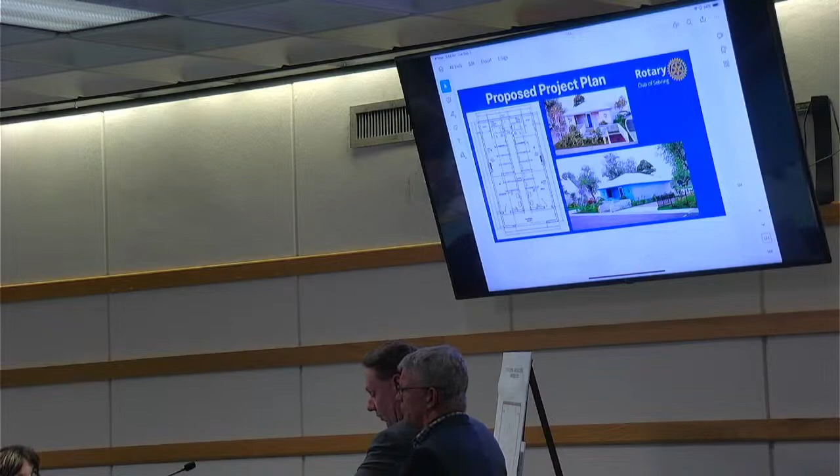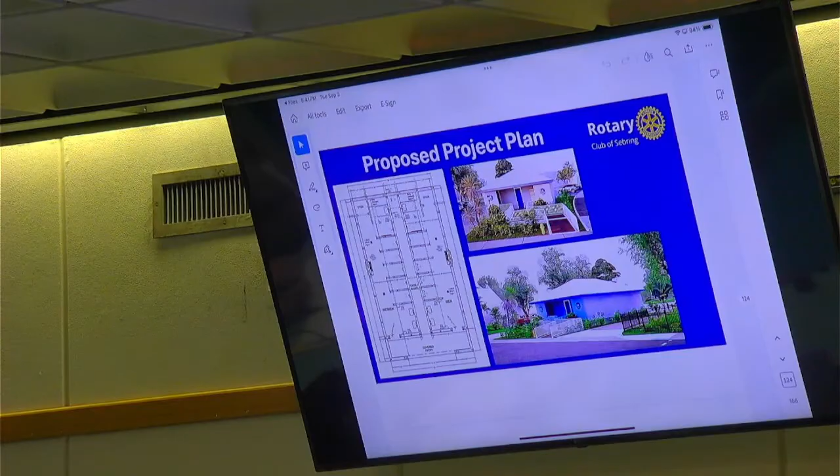It'll be concrete block walls with stucco finish inside and out, standing seam metal roof, epoxy floor with floor drains, automatic faucets, toilets, hand dryers, and lighting, air conditioned and wired for exterior lights and cameras. It'll be ADA compliant, vandal resistant. Again, we'll have built-in large baby changing tables that will be large enough to support an adult, should somebody need to change an adult. And we will also include a Rotary and Sebring themed mural that's going to face the circle.

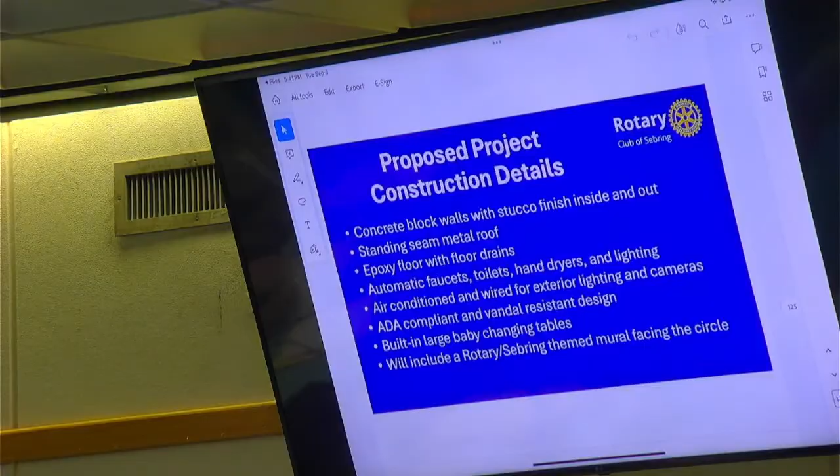The project financials are as follows. We have a preliminary cost estimate of about $200,000. The Rotary Club of Sebring is committed to contribute a minimum of $50,000, and we believe the city of Sebring is going to contribute $50,000. We have a request from the CRA to contribute another $50,000, and then the gap between that money and the ultimate cost will be fundraised by the Rotary Clubs.

We have also a number of members of the Rotary Club of Sebring here, including George Hensley, who's, in addition to being, I believe, the longest member of the Rotary Club of Sebring, also a former mayor. George, do you want to get up and say anything about the project? Yes, he does.

Thank you very much. Yes, I am the longest member of the club, not in length, but time, since 1963. And I'm the oldest member, and I don't know if that's a good thing or a bad thing, really, at this point, but I do want to just share with you that the Rotary Club of Sebring, formed in 1924, has done a lot for our community. We have Rotary Park that rebuilt the pier a number of years ago.

Our fundraising and giving throughout the community, to a lot of different organizations, doesn't get published very much, but I want to just tell you that Rotary Charities is very, very active in supporting the community and the organizations that help people within the community. So this project, we feel, is an opportunity for us to really get together, partner with the city, the CRA, and our own members and fundraisers to present this project to the city as a part of our 100th anniversary. So we encourage you to support that, encourage you to say, yes, that's a really good thing. Josh, thank you very much, our former president of our club.

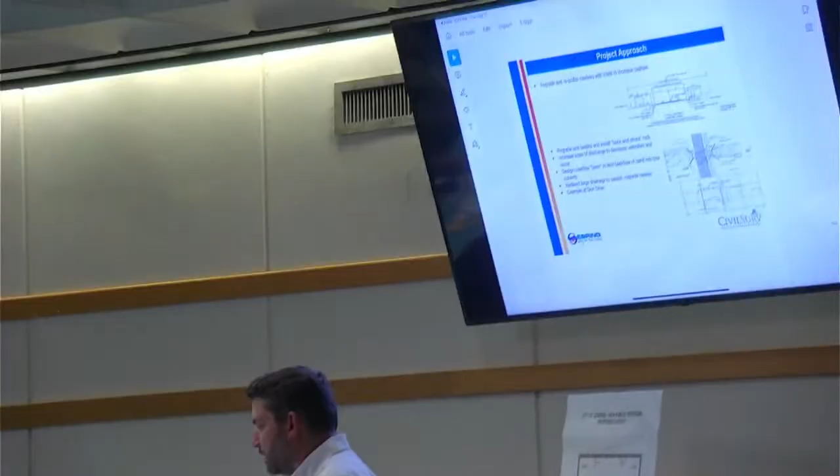This is some of our interesting approaches. So what we were doing is regrading, and this is just a typical profile of what the road looks like. Mill and resurface, then regrade it so it has a standard side-to-side slope along with longitudinal standard sloping.

Some of the large swales, we calculated how large they had to be and increased their size notably. This example is at St. Agnes, but there's another one at Don Drive. We allowed this to decrease the amount of discharge but also slow velocity, because if you make the area and volume bigger, it'll send more through. But there are some interesting things we added here.

There's almost like a berm—can't quite see it in this printout, I apologize, but depending on which one you got, hopefully it's visible. What that berm does, on the effluent side as it goes toward the lake, is stop debris from going into the lake on one side. It just skims off, and you have the fast-moving water, largely coming from large swales and culverts.

Lake Sebring is an example, Don Drive is an example, and then down by Don Jose, and St. Agnes. So those are kind of your big ones where this would be applicable.

The other benefit of the berm is to prevent sand from coming back in. So we have it so the water actually has to build up and go over into your lake. We designed it at roughly the high water mark of where your lake should be.

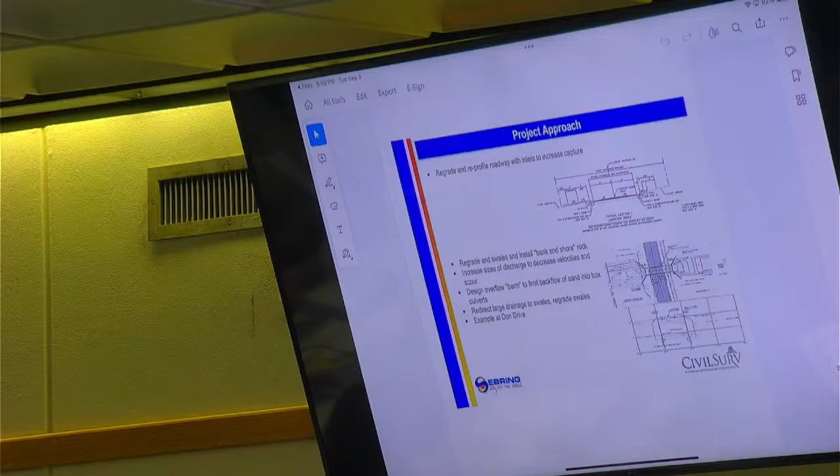All right, next slide. So we noted an unusual issue—geometry horizontal was a little off in a couple places. The lane widths actually vary, and there's an area where it looks like it should follow a radius, but it doesn't. It was almost like pieces put together of vectors—a distance and a length, a distance and a length, a distance and a length. That may well be leading to it feeling strange when driving it.

So the rule for us is either fix all of it or none of it. And what we found was a way we could do it within the area that existed, but meet all of what I'll call current rules for a roadway.

What we did was find some widths that were highly variable. Some of the narrowest lanes are actually 10.9 feet up to 13 feet, which is really, really wide—compare that to I-95, which is 12 feet. So that's what we believe might have been leading to the speeding, because we heard that. We came up with a way to address that.

What we did was narrow up the lanes to a standard 11 feet. We've got some comparable examples, so this is not unheard of—it's actually a pretty standard practice. But the reason we narrowed it up is multifold.

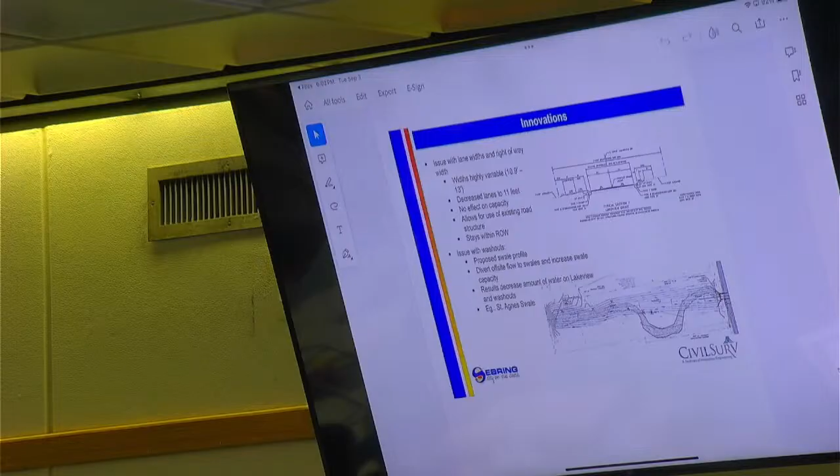And kind of where it narrows in, and this is another one at Don, where it narrows in. What we've done is put some differing types of riprap, and that's to hold the structure so it doesn't wash away during large events. This is kind of a neat thing we did at Don.

So the existing culvert is what nature cut, a path that goes basically straight down to Don and then straight over, paralleling it. The outfall there - the conveyance system is 15 to 18 inches depending where it is along there. We've increased the size to 36, but also we've cut it, and that's what it kind of goes left on your page. We put in a divider and bermed it up to force it to go into the existing channel that's already there, the existing canal.

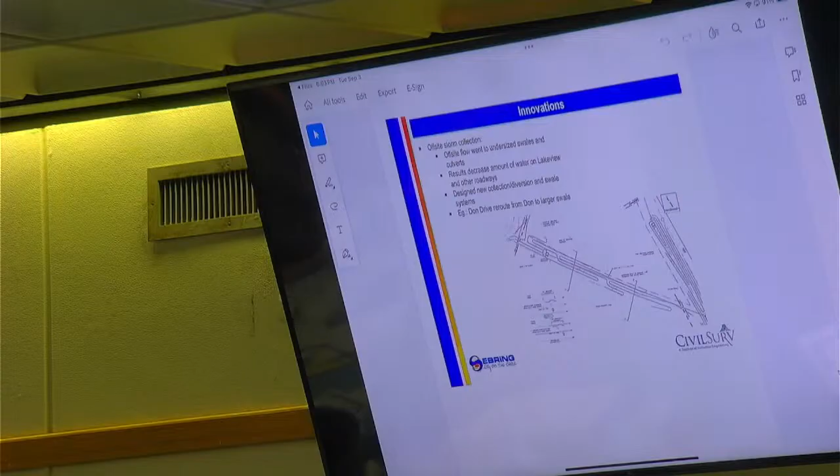And then once it goes - next slide - once it goes into that canal, what we've done is put a deep bank and shore type riprap, which is designed basically for lake systems, almost identical to what you have, but it can actually handle tidals. So it's not going to wash away like some of your existing ones.

And the width on it, just comparably, is once it gets past the seawall, roughly 2 to 3 times the width. So it'll really slow it down, that way it's not just ripping apart the lake side as it goes through. When you have a big rain event, it's designed for this big rain event, and it knows it's coming.

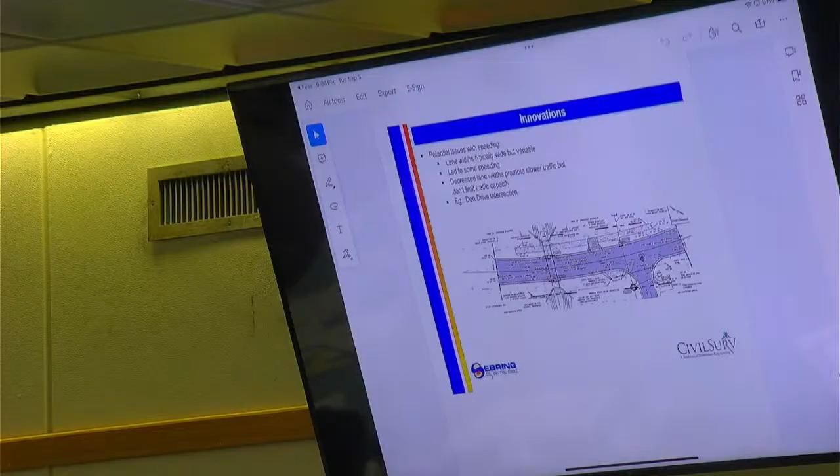This is just to kind of show you on this slide here. It's fairly incomprehensible, but you can see it just a little bit. It goes in - it's only a foot. It goes in on either lane, but it should slow things down. We looked at doing speed humps or speed tables or things like that.

One of the last slides I'll show you - it's just because of the type of road it is, it's not allowed. We'd have to completely - when I say the type, every road has a classification, every major road. And this is one of the main roads for the city, arguably. It's one of the main roads for the area, and it's called a major collector.

And because it's a major collector, unless you say, hey, we don't want this to be a major collector, we're calling this something else, you'd have to petition the DOT to get them to reclassify it. If they reclassify it, you can do whatever you want, but then it's just a local road. And if that's done, it's a tough process, and I'm not 100% certain that's what you want to do. If you want to slow it down that much, you'd actually have to put speed limit changes in, take it down to like a 25 instead of a 35, and that would prevent some of the spread in the offsite and things like that.

But just to give you a history on it, where we're redoing the first ones - the major ones are at Lake Sebring, at St. Agnes, just north of Don Jose at Don Drive. So these are some of the main ones that come through. And then, oh yeah, Pinewood - that was a double barrel that kind of goes out to a large outfall there.

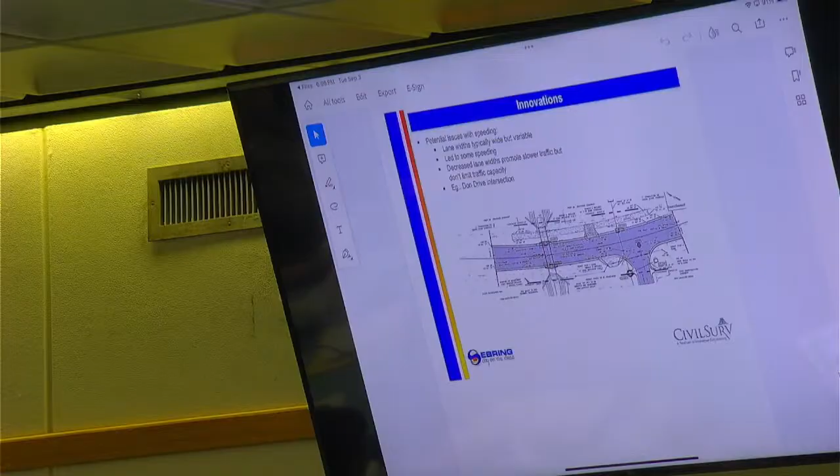First phase, and this is largely due to two things - offsite improvements. We think we can cut some costs here. But on the next one, that kind of defines what each one of these are. So at each one of these, it'll narrow up to that 11 foot, which will slow things down because you'll feel it kind of a little closer.

But when I say 11 foot, that's, I believe, College Drive - that's roughly the width there. That's an 11 foot, there's a lot of 11 foot, there's some 10 feet in the area, so it's not going to feel super narrow. It's not a tiny little downtown street. It's an 11 foot, and the actual conveying capacity is 99 point something percent of the standard 12 foot lane. So, next one.

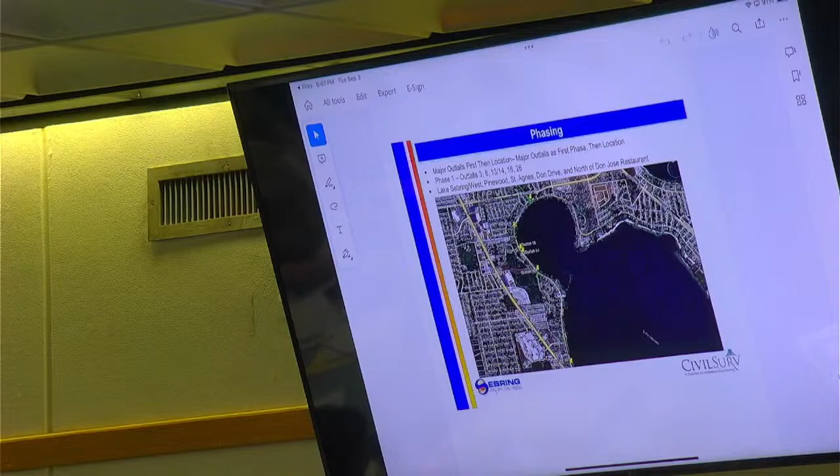So for this phase one, the initial cost right now, the estimate for construction is about 6.3, but we think we can cut a decent amount out because right now we have, just in case we can't do the offsite swale, we have a trench drain.

So we have to try to keep all of that water from coming onto the road. We put trench drain just inside the curb, because we've seen it every time there's a rain event. It either comes down off the hill or it goes down and hits that hard pan and comes in. So this was a way to cut it off from coming into the road itself.

But we believe we can cut that out and put a much cheaper option in, which is like a tiny swale. Deepest part might be 1 foot deep, basically to intercept all the offsite water and then convey it into our system. And when I say offsite, I mean from all the neighboring properties, it's largely residential.

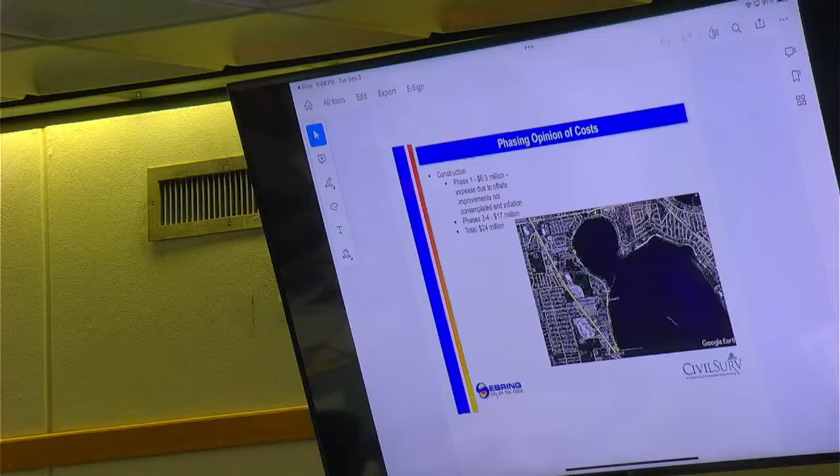Next, let's go through some comparable roadways with similar width and needs, because that's probably the only notable change. So if you're in Winter Haven, the top left is Lake Summit Drive, one of the busiest ramps in the chain up there. They only have 10 foot lanes. I think that's way too narrow for the number of boats, and they have probably more wake boats there than any place I've seen.

That's a tough one. But Lakeshore in Lake Wales, the road that surrounds Lake Wales, has 11 foot lanes. You'll note the top one, they actually split it off, they have it defined as a local. If you go into the DOT's classification, you'll see that one is weird, it's grayed out, you can see they changed it to a local. Lakeshore is a major collector, urban, and it has 11 foot lanes.

Lake June, around Lake Placid, same thing - major collector, rural, that's exactly what you guys are, 11 foot lanes. St. Lucie Boulevard in Stuart, if you've ever been to Sandsprit Park, those are 11 foot lanes.

I don't love their geometry, it's a little tighter than what you guys are going to have, but some of the biggest boats, there's 40-foot boats going out on that ramp, so they're definitely getting in there, they're getting out of there. That's the only road that connects to it.

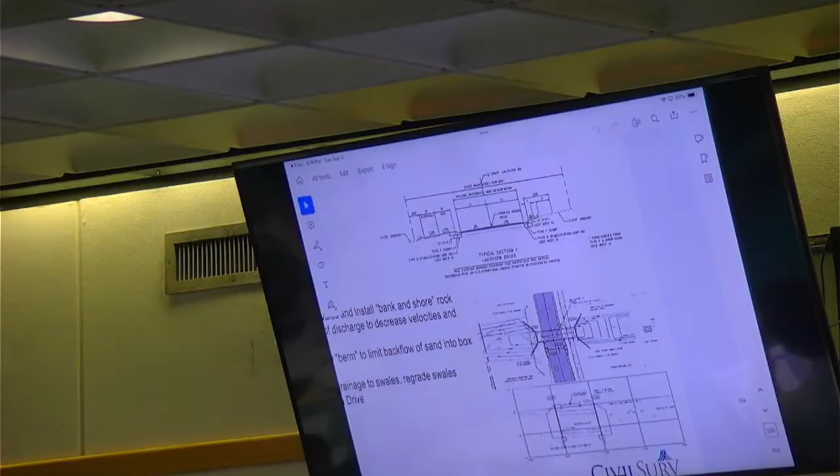Yeah, roads are all designed around center line. If you go up to, I want to say, the fourth slide, the project approach. Yeah, that one works. So this shows you what it looks like. You can define a roadway by a center line, and to each side there's a certain fall for this distance, a curb, and then a fall. And if you have everything standard, you can reconstruct it.

And that's exactly the issue we had. We tried to keep everything, but we realized we can't. Because of the variability, to try to reuse it, we had to make it slightly narrower. Otherwise, we'd have to rebuild all the other stuff, and it was far more expensive. Well, it looks like it works at these other places. Similar width and use city and county roadways are 11 feet, and there's one that's 10 feet.

Correct. That was another QC check. Would this work? That's exactly what we wanted to look at. Sandsprit has similar curves. I don't love the geometry there, but you already have a fixed geometry. We're not going to change the general layout, other than fix it and have a correct radius when they rebuild it.

But that was the beauty of it. There was enough right of way to fix it with 11. But if we go to 12, there isn't, in spots. Exactly. And the other is, we would still allow all of that stormwater to go onto the road.

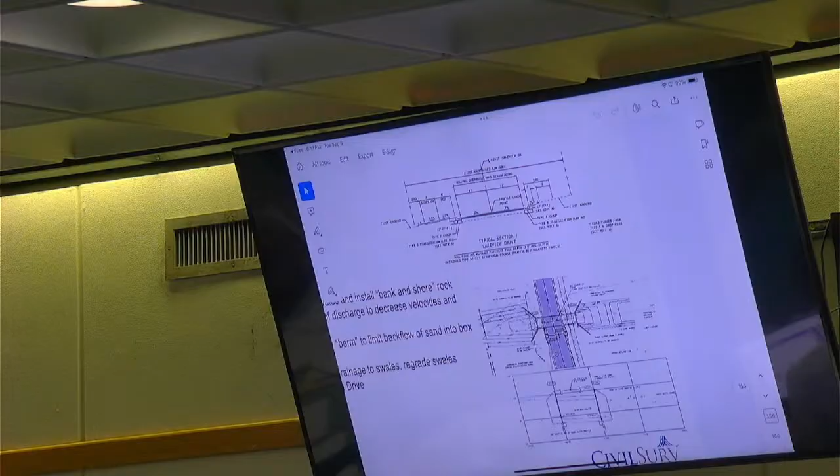There's just not enough room in some areas. Otherwise, we'd have to move approximately, I don't know, probably quite a few thousand feet of water main. Or we just don't fix it. And then if we don't fix it, it'd still be considered a failing road. Then we'd feel like, well, what did we give you? Every major storm event, we'd have to sign some waiver saying basically, hey, look, as long as you guys accept this, it doesn't meet current engineering standards, and you're going to be like, well, what'd you give us?

And so the parts where the vegetation was an issue with the swale going into the lake, that's going to be fixed then? Yes, ma'am. And then, I saw in some of the stuff when I was looking over it, how do you keep, I don't know what the proper term is, the nutrients, the bad stuff, how do you make that go back into the ground instead of into the lake?

Great question. So what we're actually doing in all of these, there's a couple things. The swales help a lot, and that's kind of why we held it back so it didn't flow directly in there. So it'll have to build up to a certain point. It'll cause some settling to occur inside the swale, so that during low periods of rain, you can actually access it and clean it out. It'll largely settle kind of at the end of your box culvert, which means you can get in there, get it out, and so be it.

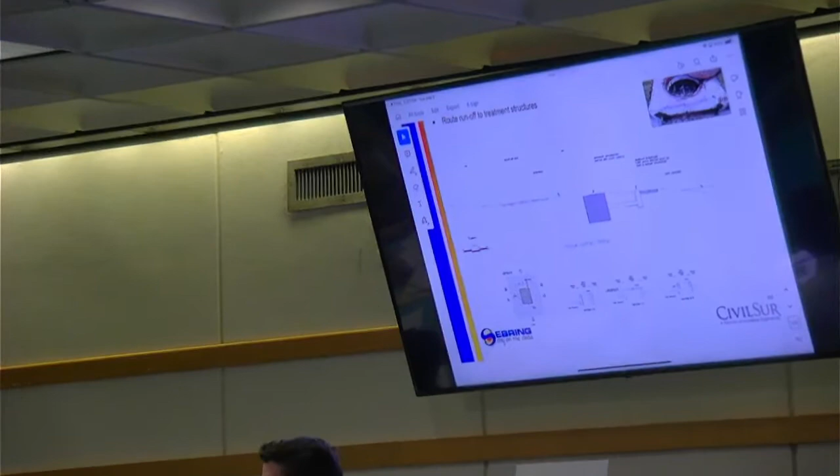But the other is the inline, and that was, I think, slide 2. Oops. That's kind of the meat behind this project, and that's the way we were able to get a lot of the... next one. This one here, yes, exactly. That's a baby version of it. You'll have some much larger units. I think the biggest is 10 by 14. So because it's a large road, there's also off-site implications here.

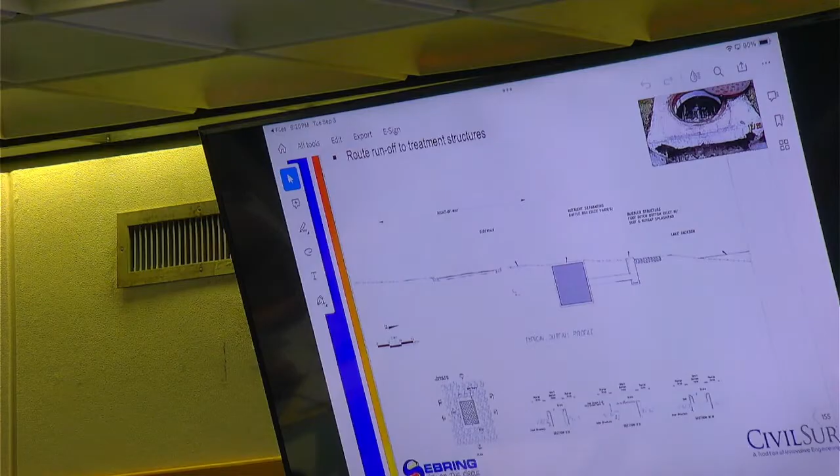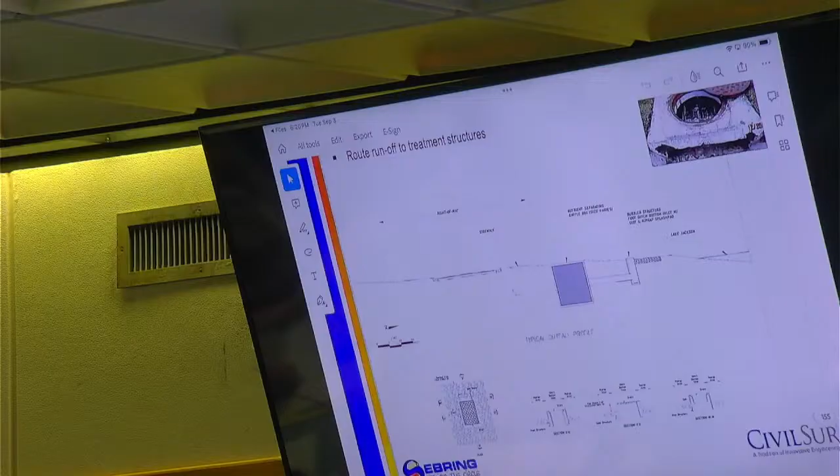What it has is these inline treatment units that have a reactive media. It's actually created by the University of Central Florida. There's a media within it that reacts with both the nitrates and the phosphates to remove them and gather them, and then every 5 to 10 years you can replace the media. You don't do a regular clean out? Yeah, there's a regular clean out. So it has a floating turbidity barrier and a basket for the normal leaves and things like that. If it gets through that, there's the other barrier. Then there's also a settling area for sand and things like that at the bottom.

That's where you just pop the lid off, and in one area you can get the leaves and other debris, the other you can get the settled sand and things like that. So yes, that's kind of the meat behind it. They're cleaned typically quarterly. But also they have to be so big to allow for the reaction time and removal of some of these nitrates and phosphates. Thank you. Anybody else?

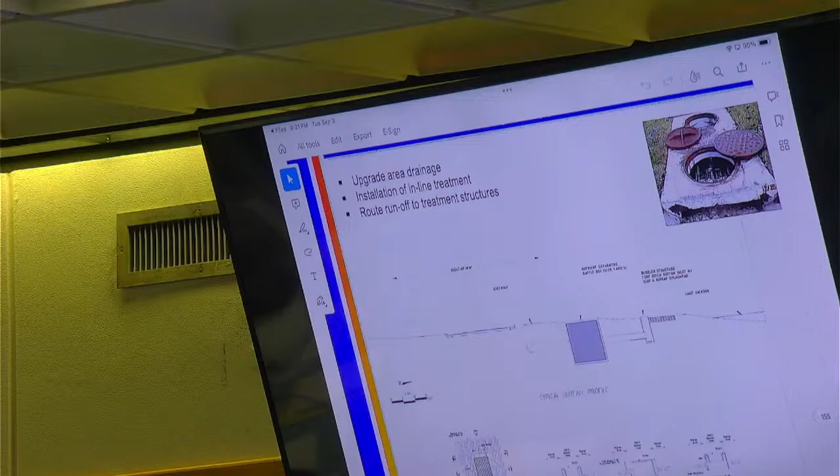Mayor? You mentioned in your first statement something about a smaller culvert on a repair job. What did you mean by that? Yeah, so if you scroll up to the second one up from here. I believe it was this one. It had blown out. Some of these culverts and conveyances that go under the road are undersized, and we were calculating how far undersized. A bit ago we came back and said, hey, it's very possible that they might fail, and then we had a major rain event, and one of them failed. That's why we phased it the order we did. Well, you're not going to put a larger size; maybe I heard you wrong, since it was much larger.

Repaired? Yes, it was a temp repair. Right, but the way I understood it, you were not gonna oversize it, you were just gonna leave that like it was. Oh no, that one will go away. That was very temporary. Okay. Apologies, I'm sure I worded that wrong.

What I meant to say was, yes, it will take quite a long time for nature to do its work again and blow that apart, but it eventually will again. And that's why the meat of this project is basically to vastly improve your arterial networks of water.